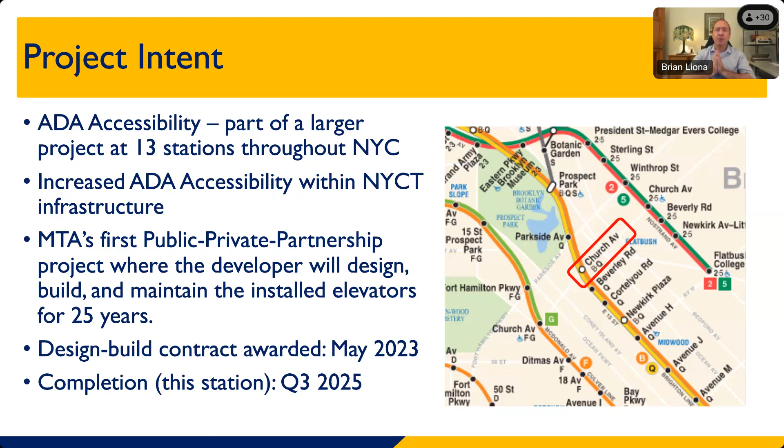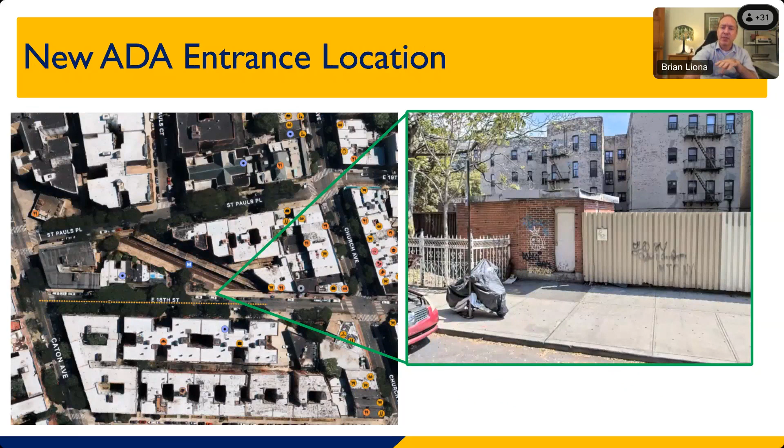This part here is a rendering of how that new entrance is going to look. I'll jump back - here you see on the right that area on the sidewalk, and where you see the corrugated steel and that brick structure, that's an unused MTA staircase, and we're right above the tracks right now. This is an open cut station, and we're going to replace that with this new entrance right in the middle of East 18th Street.

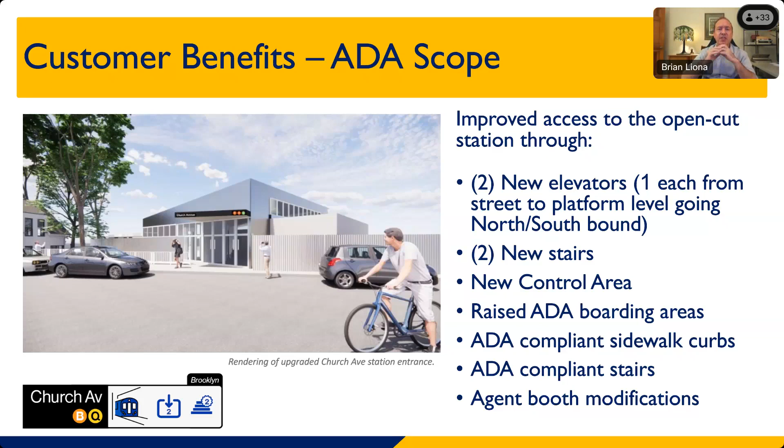We're going to put in 2 new elevators, 1 elevator to each platform, and 2 new staircases. The area you see right in the center, that's our control area, and that's how you're going to enter the station, buy a fare if needed, go through the turnstiles, and then go down to the platform below. We're installing ADA compliant stairs in that location, updating the platform boarding area, and installing tactile tiles at the platform. We're also doing modifications to the agent booth to make sure it's ADA compliant as well.

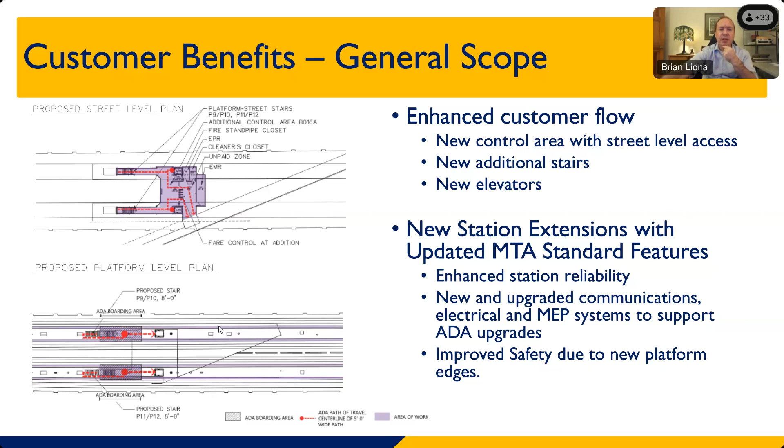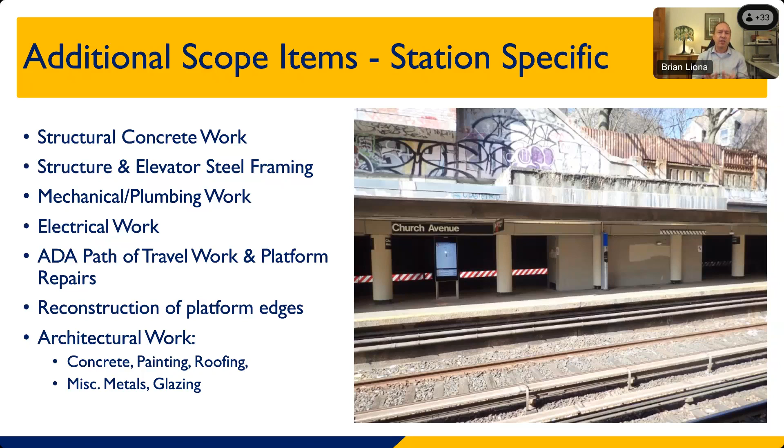As part of this, and to support the elevator, we have new concrete work going on, the elevator framing, and the mechanical and electrical work to support the elevator. The platform is being repaired, and new tactile edges are being installed throughout the platform. We're installing a brand new control area in the middle of the platform that's going to have a new roof, new walls, new glazing, new everything, because it's a brand new and pretty inviting control area.

To preempt an obvious question, why are we putting this in the middle of East 18th Street instead of at Church or Caton? The answer is that at both of those stations, the platform gets much narrower toward the end, making it much tougher to fit in the staircase and elevator. Also, because these are existing stations that MTA has been expanding for years, those areas have electrical and signal equipment. Relocating that would add a lot of complexity, months of time, and quite a lot of money.

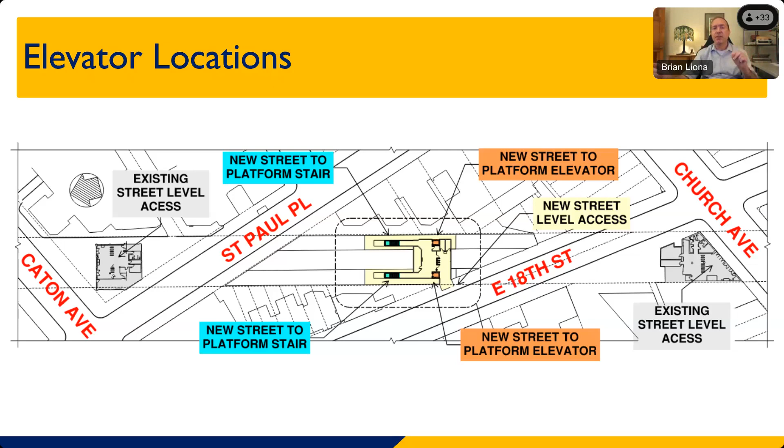So going through that, you can see this East 18th Street entrance, and you can actually see it visibly from the Church Avenue area. By putting it here, another benefit is that the existing stairs at the station are at either one end of the platform or the other. So now we're putting in two more stairs that give the customer an option to exit right from the middle of the station.

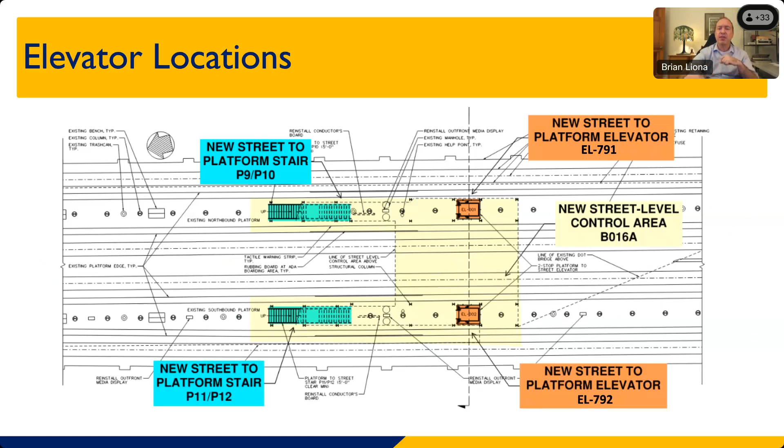Our overall schedule: the contract is going to begin to mobilize at the end of this year, and they're going to start to set up their work area and do some utility relocations that are needed. Additional work will start in the springtime of 2024, and we're going to start with the southbound platform.

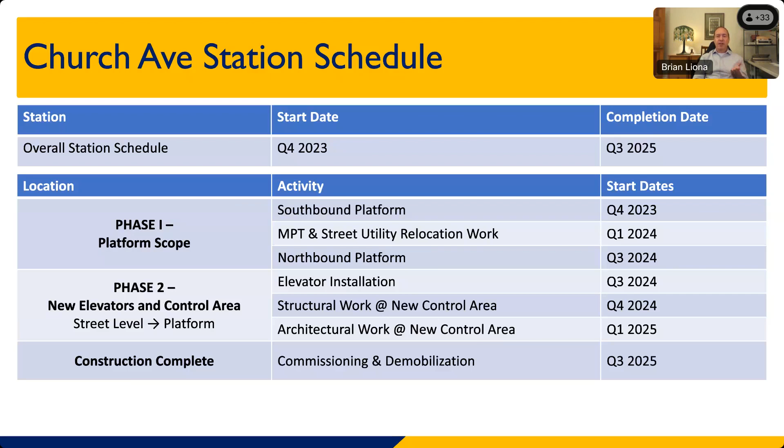By the end of 2024, we'll start to do work on the northbound platform. We'll start to install the elevators in the 3rd quarter of 2024. Then for about a year, we'll be doing mostly elevator work and installation, with final installation and commissioning of everything by the 3rd quarter of 2025.

Another key item you're going to want to know about is how are we going to accomplish this, because we're putting in a brand new control area right over the active tracks. It's a complex project, to be truthful about it, and we actually studied quite a few ways to get this done as efficiently as possible.

To do this, we are going to have three partial closures. What those closures entail is that the station will never be closed full time. However, for 60 days at a time, we will have to close down either the northbound or the southbound tracks. When that occurs, a customer would have to take the train to the next stop and ride back to get to Church Avenue.

Additionally, in the center, two tracks are the express tracks. They will be closed down also for 60 days. During that period, both the northbound and southbound tracks will be open.

Now, even with that work, when we bring in items like the structural steel and start to bridge over the tracks, we will have a total of 8 weekend full closures. Those will occur on a weekend only, beginning on a Friday night at 10 p.m., and the station will be back in service Monday at 5 a.m. So for that weekend, the station will be completely closed.

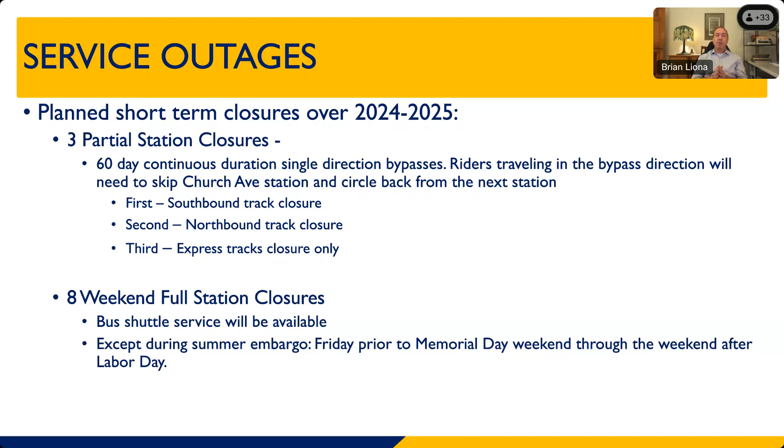Because of that, MTA will provide bus service on that line, so customers impacted by the closure will still be able to get to the next open station by bus. We also provided constraints that this work could not occur during the summertime period, so any full weekend shutdowns will occur on weekends not including Memorial Day weekend and Labor Day.

If you're in the area, you may have seen some of our people out there. The contractors had teams out there, and MTA has had teams out there. We've been surveying the station and conducting test pits to make sure we know where the utilities are. There's quite a lot of tests we have to do to check the conditions, what's in the soil, where the utilities are, and all that has been going on for the last couple of weeks.

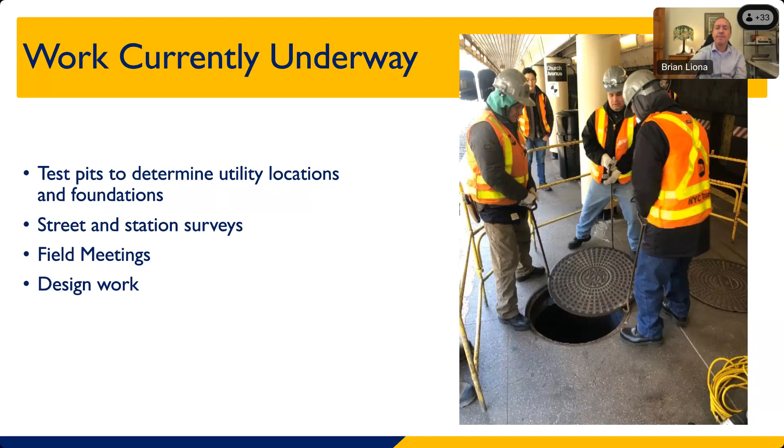Okay, so I've gone through all of our slides, and we can open up to your questions and any comments from the group. Joel, I think you're on mute. All right, thank you for that presentation, it was very impressive. So if anyone has a question, just raise your hand and I'll call you and we'll unmute you if you're muted.

I have a question. Is the work going to be done during the day, not nighttime hours? Because when I saw that 18th Street, I'm thinking of the people that live on that block, probably suffer some while this is going on.

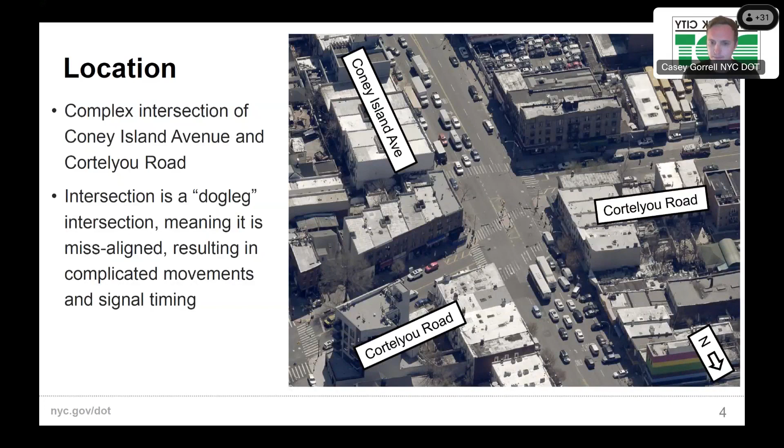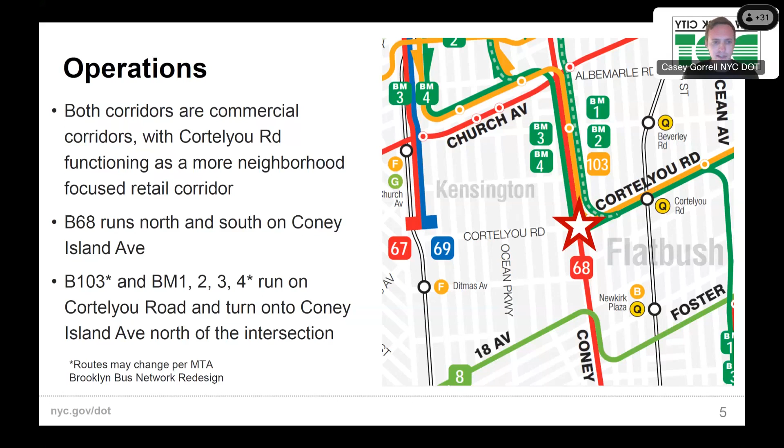Currently, both corridors are commercial corridors, with Cortelyou Road functioning as a more neighborhood-focused retail corridor with restaurants, bars, and retail spaces. The B68 bus runs north and south on Coney Island Avenue, and the B103 and the BM1, 2, 3, and 4 run on Cortelyou Road and turn onto Coney Island to head north at the intersection. Some of these routes have been discussed as part of the MTA Brooklyn bus network redesign, which isn't final and is still in draft form, but we are coordinating with New York City Transit and MTA on bus operations as part of this intersection study.

Due to the wide nature of the intersection, when Coney Island bound left turns got the green light, they would actually jump in front of through traffic to beat it into the intersection. This led to a lot of near misses with pedestrians who were in the crosswalk with the right of way.

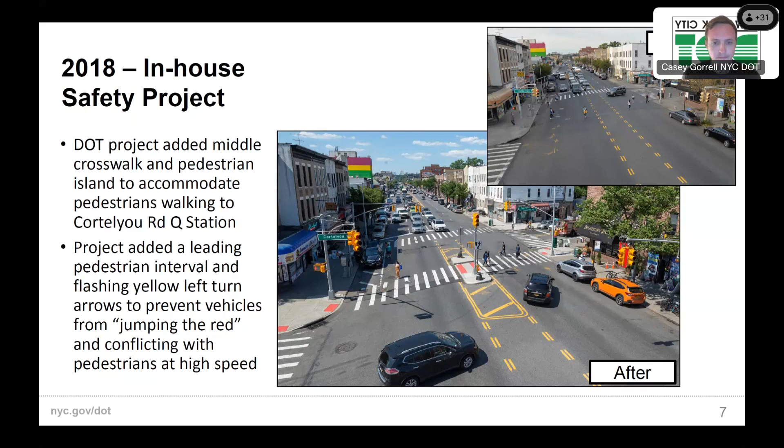As part of the project, we do standard before and after safety analysis, looking at 3 years before and 3 years after. Since the project was installed, we saw a 30% reduction in injuries for all roadway users, and specifically a 40% reduction in pedestrian injuries. One thing to note is that our before-after safety analysis only accounts for reported injuries, not more perceived safety issues such as near misses or the general feeling of being unsafe in the intersection. We can't really analyze how people feel, but we can look at reported injuries, where we did see a reduction in crashes.

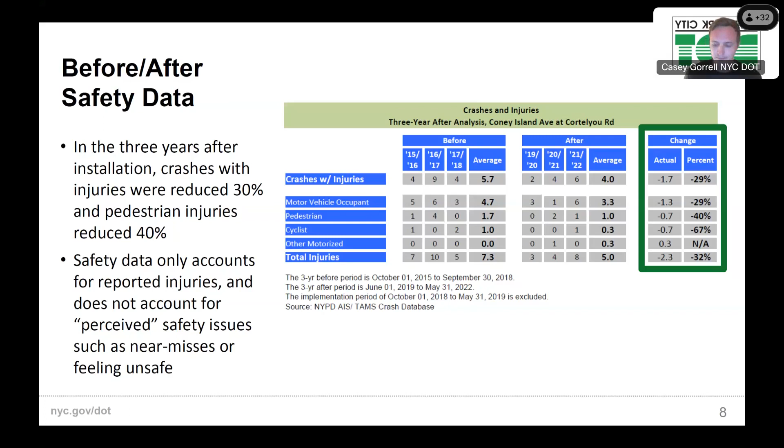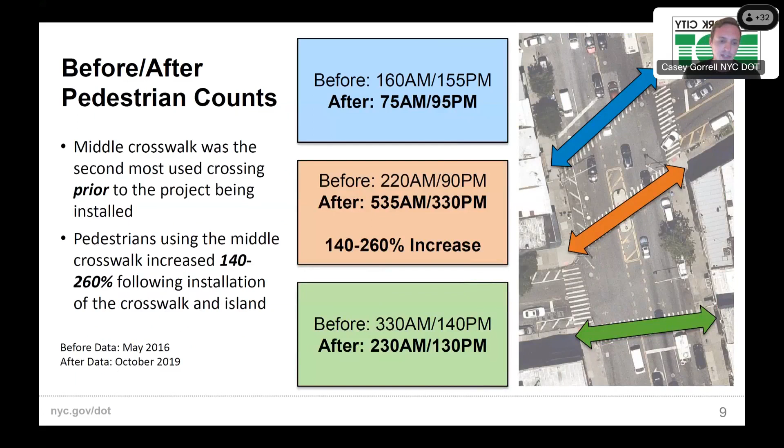We also did before-after pedestrian counts to see who was using the crosswalks. Prior to the project, the middle crossing, which was unmarked, was the second most used crossing in the intersection, with over 200 people using it in the AM period. After the project was installed, we saw a 140 to 260% increase in people using that crosswalk. That middle crossing is now the most used crossing in the intersection, with over 500 people in the peak hour. These pedestrian counts were collected in October of 2019.

So, existing conditions. We've gotten a lot of requests for further changes from the community - 138 requests for improvements to the intersection since 2018 and the project being installed. We saw a spike in requests after the project was installed in 2018 and 2019, and saw that spike again in 2023 after a community-led organizing effort at the intersection. The vast majority of these requests were from private citizens.

We did a bit of analysis of what people were requesting. Pedestrian issues were about half of the complaints, primarily the conflict between pedestrians and vehicles going at the same time across Coney Island Avenue - that was the most identified issue. The second most requested item was adding left turn arrows, as well as general safety concerns. Other requests noted included looking at turn bans, making right turns only, removing the crosswalk, alleviating congestion, and enforcing double parking.

So the area of interest is Cortelyou Road and Coney Island Avenue.

The main issue here is the non-standard movements. The through movements cross multiple crosswalks as you go along Cortelyou Road. By design, the through movements function as a left turn followed by a right turn, where people turning left across the middle crosswalk are required to yield to pedestrians with the right of way. However, the non-standard operations do lead to some confusion and aggressive turns.

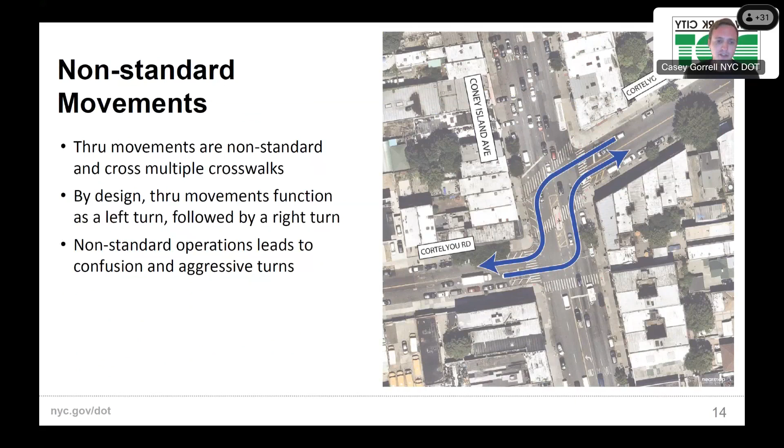Due to the complex movements, the middle crosswalk does proceed at the same time with these turns due to signal timing. We've noticed that many vehicles do not fully yield to pedestrians with the right of way in this crossing. We also want to note that pedestrians in this intersection have no dedicated crossing time in the signal phasing. All crossings are shared with turning vehicles for all movements.

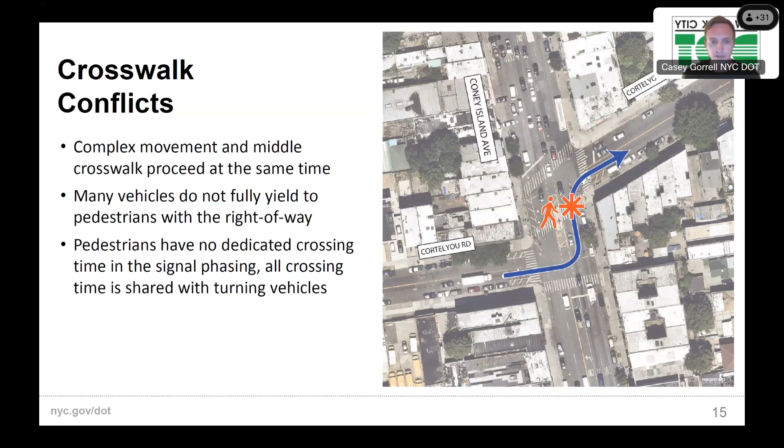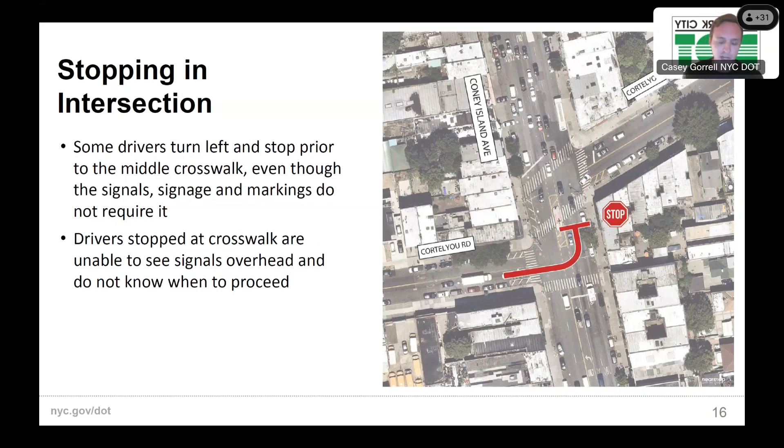We also noticed that some drivers stop in the middle of the intersection when they make a left turn from Cortelyou Road, even though the signal, signage, and markings don't require that. A big issue with that is that when drivers stop at that middle crossing, they're not actually able to see the signals overhead, and they have no idea when they're able to proceed on a green light for Coney Island Avenue. This leads to aggressive driving, congestion, and a lot of honking.

Another issue at the intersection is the difficult left turns from Coney Island Avenue to Cortelyou Road. Due to the heavy through volumes on Coney Island Avenue, the left turns are very difficult to make, and there's not a lot of gaps in vehicular traffic.

The difficult left turns are a driving factor which led New York City Transit to consider moving buses off of Cortelyou Road onto Beverley Road. This intersection was a major driver of bus congestion and delay. Also at the intersection, many of the left turning vehicles actually turn on the red at the end of the signal phase because that's the only time there's a gap in through traffic.

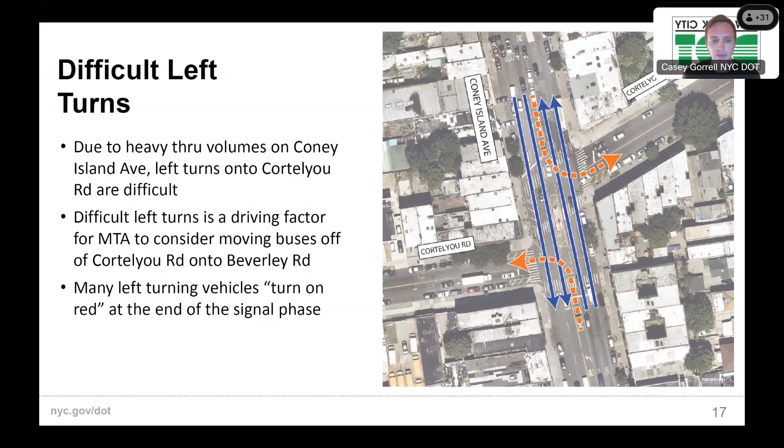As part of our analysis, we wanted to really identify who's in the intersection and what people are doing. At a very high level, 1/3 of people using the intersection are pedestrians, the majority of which are crossing Coney Island Avenue. The other 2/3 are vehicles, trucks, and buses. Also an interesting note is that most of the traffic is actually on Coney Island Avenue. Cortelyou Road is actually a relatively small portion of people in this intersection.

Now I want to go through some of the design scenarios that DOT has analyzed. We're really looking to get community input on these and gain more information on possible issues that we didn't identify, and also get reactions to some of these proposed treatments. I'll be outlining the scenarios and going over pros and cons of each, and also providing an initial determination that DOT has made on potential feasibility.

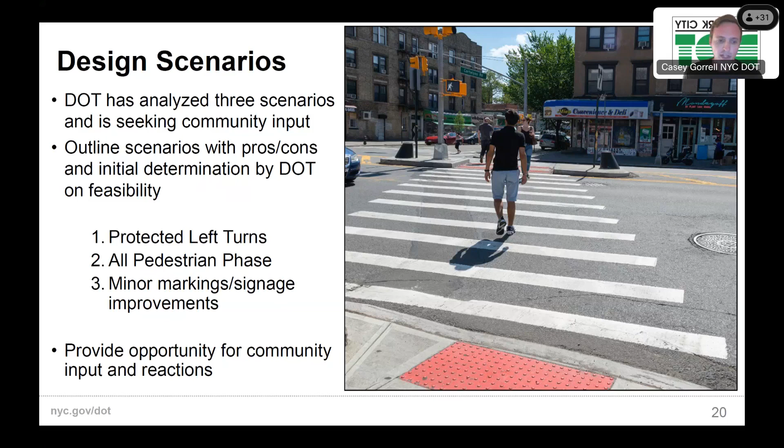So the first one is looking at protected left turns for Coney Island Avenue. The second is considering an all pedestrian phase for the intersection. And the third is looking at making minor markings and signage improvements. Then at the end of this, once we go through all the scenarios, we'll open up for community discussion and reactions.

So the first scenario we looked at was adding protected left turns to Coney Island Avenue to make the left turn onto Cortelyou Road. This scenario would add a 12-second protected left turn phase with a green turn arrow. We would not make any other changes to the intersection under this scenario.

So what would you have to do to make this work? Currently, the signal timing is limited to a 120-second signal cycle. A good way to think about signal timing is that it's a pie, everyone gets a slice. You don't really add time, you have to take it from someone else. So if you want a new slice, you have to take it from another direction.

A big issue at this intersection is that the existing phases for Cortelyou Road are unable to be merged due to the offset geometry and vehicular conflicts. So we currently have to have the phase for the split LPI and Coney Island Avenue through traffic, then a phase for eastbound Cortelyou, and then a phase for westbound Cortelyou.

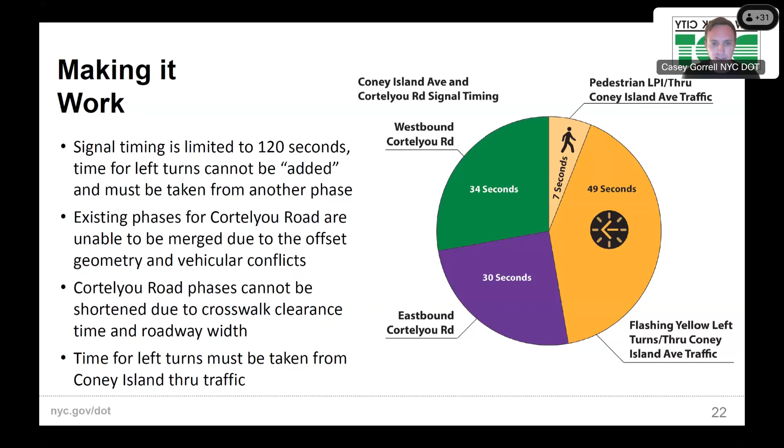Another issue with changing the signal timing here is that the Cortelyou Road phases cannot be shortened, due to the crosswalk clearance time and roadway width needed to allow pedestrians sufficient time to cross Coney Island Avenue. As a result of these limitations, the time for the left turns must be taken from Coney Island through traffic.

So that's where it is proposed. After Coney Island through traffic gets their phases, there would be a 12-second protected left turn phase. Instead of the current 56 seconds that Coney Island gets, it would result in only getting 44 seconds.

In comparison, Coney Island Avenue gets 81 seconds of green time at Avenue C, the next intersection to the north. This reduction in time would greatly reduce capacity and would result in queue spillbacks.

It would spill back all the way to Dorchester Road in the AM, and would spill back to Avenue C in the PM peak hour. The level of service would actually degrade from a D and C to an F and D, and the congestion would be very noticeable to the community.

A big reason we're not super concerned about overall level of service, but the queue back is something that can be very dangerous for people, because it could block crosswalks at nearby intersections and cause a lot of aggressive driving at the tail ends of those queue backs. So that's something we're definitely concerned about.

As part of all these scenarios, what we did is take the existing roadway users and determine who would be impacted or affected by these changes.

Adding a left turn phase would improve operations for about 5% of roadway users, those making lefts from Coney Island Avenue to Cortelyou Road. However, the left turn phase would worsen operations for 44% of roadway users who are just driving through on Coney Island Avenue, which also includes bus riders on the B68.

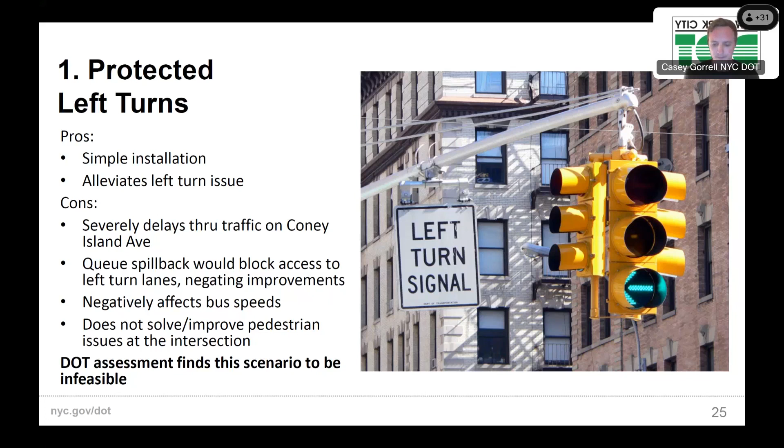The second scenario we looked at was adding an all-pedestrian phase, otherwise known as a Barnes dance, to create conflict-free crossings in the intersection.

This would also add a long protected left turn phase for left turns on Coney Island Avenue without impacting through traffic. However, the required change is that all traffic on Cortelyou Road would need to make a right at Coney Island Avenue. The through and left turns would be banned.

This allows for the consolidation of both signal phases for Cortelyou Road, as there are no turn conflicts between vehicles.

How would this work? To allow for that new all-pedestrian phase, both Cortelyou Road signal phases must be consolidated, requiring all traffic on Cortelyou Road to turn right, as shown in the diagram. The left and through movements would be banned, with turn restrictions reinforced with marking, signage, and vertical elements.

FDNY operations would be maintained, and emergency vehicles would still be able to make all the turns with sirens and lights activated.

So where would these drivers go? From the eastbound direction on Cortelyou Road, the nearest available options are to use Avenue C or Ditmas Avenue to then make the left or right onto Cortelyou Road. For vehicles currently traveling through, that's about 130 vehicles in the peak hour, or 5 cars per signal cycle.

For eastbound traffic on Cortelyou Road turning left to go northbound on Coney Island Avenue, the nearest diversion would be to continue on Ocean Parkway or East 8th Street to Avenue C. That's about 40 vehicles, or 2 cars per signal cycle.

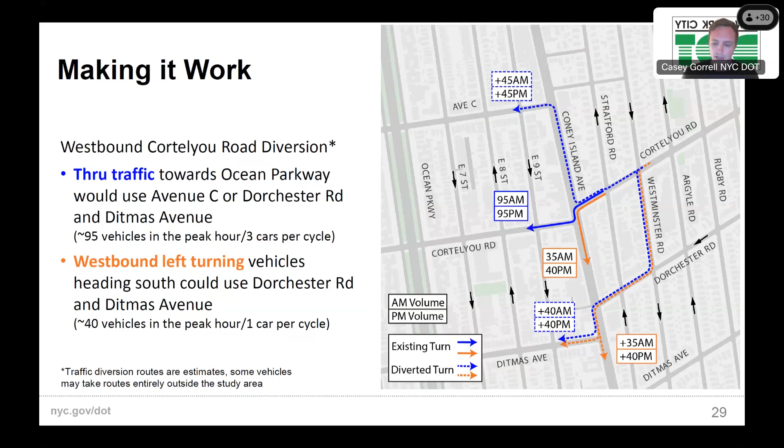One thing to know is that these traffic diversions are kind of the worst case scenario. There's a lot of other routes because we're a grid network, so some vehicles might take entirely different routes to avoid these turn bans. It's not necessarily that all traffic is going to be going down Westminster Road.

So how does this work from a signal timing perspective? Here's the existing and the proposed on the left and right. The traffic diversions allow for the consolidation of the 2 Cortelyou Road phases. The first phase would be Coney Island through traffic. The second phase would be the southbound and northbound left turns from Coney Island Avenue to Cortelyou Road, which would be paired with dedicated right turn arrows for Cortelyou Road onto Coney Island Avenue. This would be a pretty long cycle, so 30 seconds is fairly long for a left turn and definitely for a right turn.

And then the final phase would be a new all-pedestrian phase, which will allow for conflict-free crossings in all crosswalks, giving the 37% of roadway users, in this case pedestrians, about 30% of the signal timing as dedicated space for them.

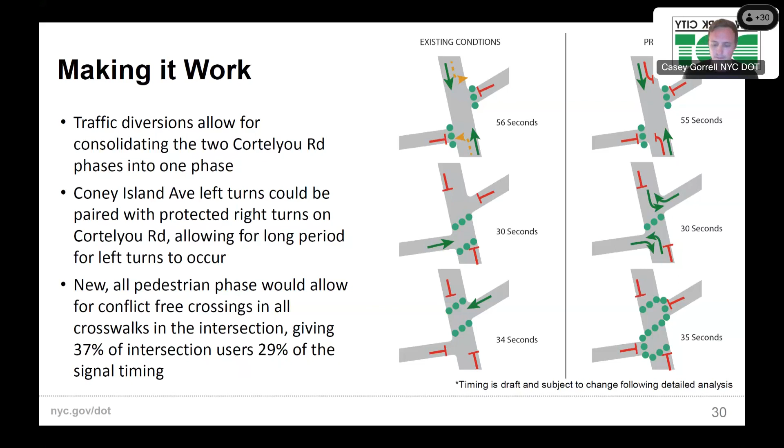So who is impacted by this change? The diversions would worsen operations for 6% of the intersection users, those traveling through and left on Coney Island or on Cortelyou Road, as they'd have to find alternate routes.

The left turn phase would improve operations for 5% of users, those making the left turn from Coney Island to Cortelyou. And the all-pedestrian phase would greatly benefit operations for 37% of roadway users, the pedestrians, by creating conflict-free crossings. The remaining 52% of users would see limited improvements or no changes to operations.

So pros of this scenario: it improves operations for a large percentage of users, 42%. It alleviates the left turn issue, which is the second most requested issue at the intersection. It also alleviates pedestrian safety concerns by creating conflict-free crossings, and it improves bus operations, alleviating concerns from New York City Transit about bus operation delays on Cortelyou Road.

Cons: it does divert some traffic, and some users would have to find alternate routes. Maintaining emergency access does not allow for physical barriers to reinforce the turn bans, so compliance with the turn bans and diversions could be problematic and is something we need to evaluate further. But at a high level, the DOT assessment finds this alternative to be feasible, pending some additional review and potentially additional traffic studies.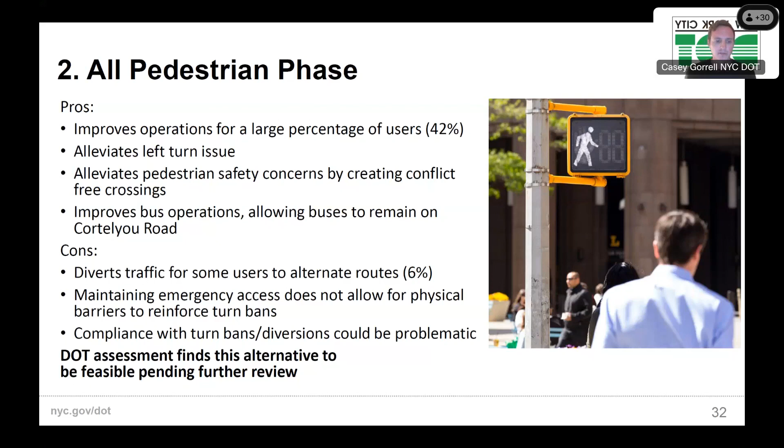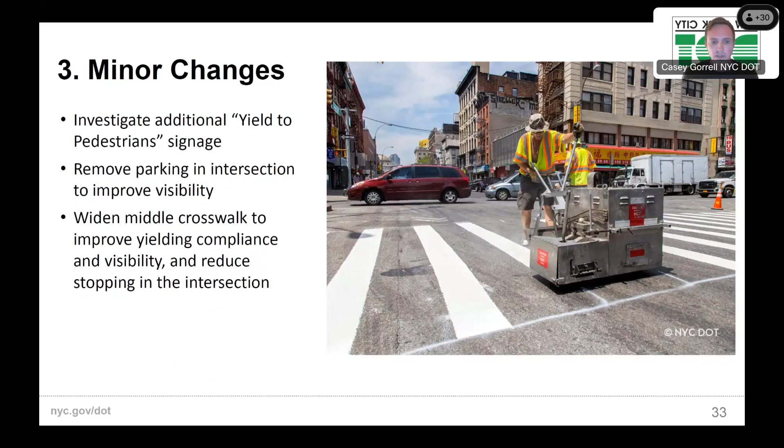The final scenario we looked at is relatively minor, where we would make very minor changes to the intersection. We would investigate additional yield-to-pedestrian signage, look at removing parking in the intersection to improve visibility, and also look to widen the middle crosswalk to improve yielding compliance and visibility, and reduce that stopping-in-the-intersection issue.

Pros is very simple. Cons: it doesn't really solve the left turn issues, it doesn't improve bus operations, and it doesn't really solve the pedestrian issues at the intersection. But we do find this to be a feasible alternative due to its minor nature.

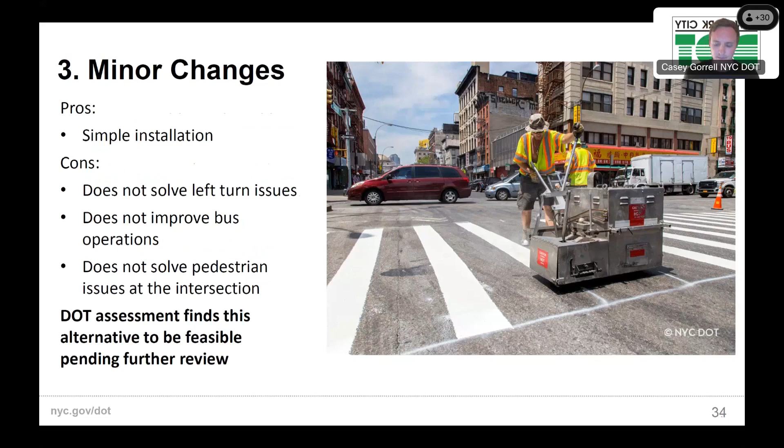So I'd actually now like to open it up for an open discussion about the scenarios. Following this conversation, we will look to select a scenario for further review and then come back to the boards with a full proposal, and then look to identify an implementation schedule, which will be dependent on what is picked as a proposed scenario. Great, thanks Casey.

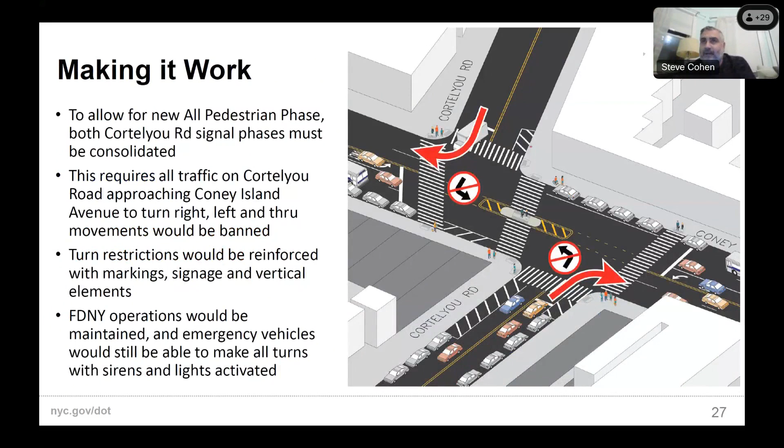One concern I do have, one thing you might give some more thought to, is requiring drivers going eastbound on Cortelyou to turn onto Coney Island Avenue. My concern is that because Dorchester is one way in the other direction, drivers who would usually take Cortelyou across would now have to go all the way down to Ditmas before they could turn, down Coney Island Avenue to Ditmas, then back up. I mean, people can rearrange their routes and use side streets, but that one seems a little more awkward for drivers than the other direction, at least to me.

The other thing I was thinking of, in terms of left turn limitation, if you gave any thought to limiting left turns in the northbound and southbound direction. For example, in the northbound left turn onto Cortelyou, if you foreclose that, I'd assume Avenue C could pick up that traffic relatively easily. And southbound, assuming the buses are still turning left on Cortelyou, it might be worth making that a buses-only left turn during peak hours, because that left turn lane gets really backed up. Limiting it to buses only during peak hours would really help.

Last thing, I think a major issue is the double parking right at the intersection of Coney Island Avenue and Cortelyou Road. Those auto dealers have been using that lane for as long as I've lived in this neighborhood. Something has to be done between the precinct and CB12, because that's creating problems—drivers get impatient and frustrated, which causes them to run red lights and makes the intersection unsafer. I realize it's not DOT's issue, but I think it has to be on our radar for making this intersection safer. Thank you.

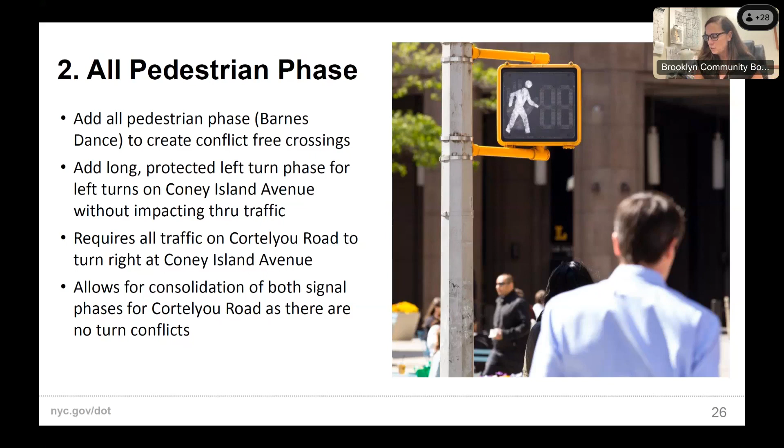I want to take a little issue, not to be picky, with describing Coney Island Avenue or Cortelyou Road as being more neighborhood-focused retail. I feel our community members who are Pakistani American and Bangladeshi American might disagree—the barbers, the groceries, and the masjids on that block might feel they're also a neighborhood-focused retail corridor. So only insofar as that informs how you proceed on both corridors, I just want you to be mindful of that. And I love Steve Cohen's suggestion that we look at teasing out the left turn bans to see if there are other machinations by which they can be organized. Thank you for all of that. You know where to find me if I can be helpful.

Casey, I don't know if through some of these responses that you're hearing, what's your take back, how you feel about some of the feedback you're getting.

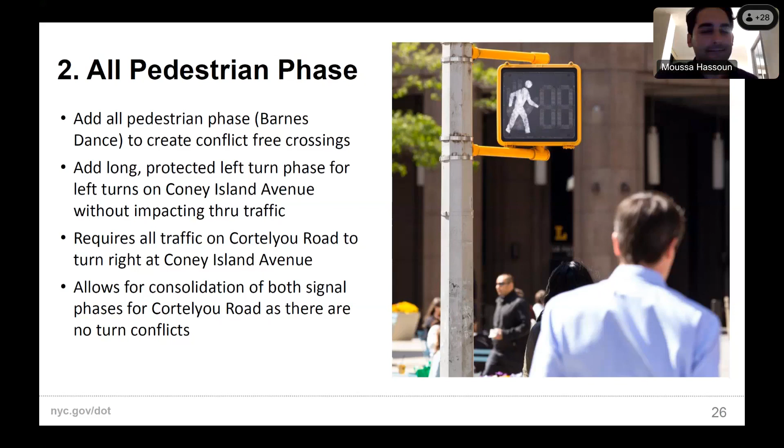Yeah, I think I can just kind of summarize a couple of them. One thing that was noted is the left turns from Coney Island Avenue to Cortelyou Road. I think that's something we did consider. The most important thing is that we definitely don't want to impact bus operations, so doing a bus-only turn is definitely feasible. Compliance is an issue we've seen where we've done bus-only left turns in other parts of the city, so it's not insurmountable, just something that would need thought. The reason we didn't propose it here is because it wouldn't really solve a lot of the issues we see at the intersection. The inability to make a left turn, banning it doesn't make it any easier. And the pedestrian issues, we don't see that left being as big of an issue as the Cortelyou Road left, so we prioritized focusing on those. It's definitely something we could look at, but that's in regards to that comment.

For the neighborhood retail comment, definitely heard. That's more specific, not to generalize the entire corridor, just more for this immediate intersection. But we definitely understand that comment.

And for process, yes, we definitely hear that this is something the community's wanted, and it's something we are looking to prioritize once we have a direction to go in.

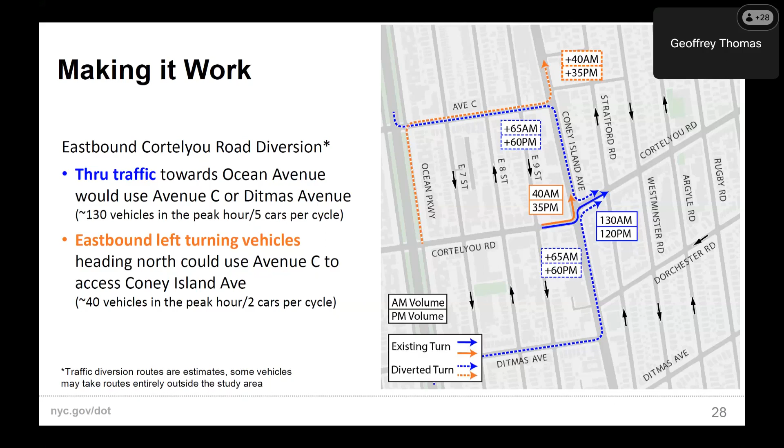Hi, hope I'm connected. Thank you for the presentation, I'm glad you are thinking about this intersection. For some context, I live at Avenue C and Coney Island Avenue, so I'm very close to this intersection and I see issues with it all the time. When I've been out talking to folks, saying we're petitioning for better bike infrastructure or bus lanes or speeding up the bus, a lot of the people I talk to say, can you get the DOT to think about Coney Island? They tell me, I hate that intersection, I think it's so dangerous, I go out of my way to try to cross. People will just bring this up whenever you bring up anything about street safety or street effectiveness in the area.

So a lot of people want this, and I think that speaks a little bit to an interest from the community in doing more. So I would encourage you to think about more ambitious changes. I think the Barnes Dance proposal you have really feels like a minimum. I'm supportive of it. I think it's a decent idea. I think it'll make a lot of people feel safer.

Like the fact that cars have what they think are green lights, but there's also the intersection crossing, it feels like you're allowed to turn, but there's also the pedestrian signal, which is deeply confusing. It feels deeply dangerous. I do want to encourage you also, like I know there's a lot of families, a lot of people who have accessibility needs for crossing this area.

I want to encourage you to think about weighting vehicles versus pedestrians when you think about what's going to change. It is significantly easier for vehicles to go a little bit out of their way versus pedestrians. We know there are pedestrians, myself included, who will go out of their way to avoid the intersection, who will say, maybe I just won't go to this business or location on the other side. I don't want to have to cross it. So I think in terms of how you weight this, it takes a lot longer for a pedestrian to go one block out of their way to get somewhere.

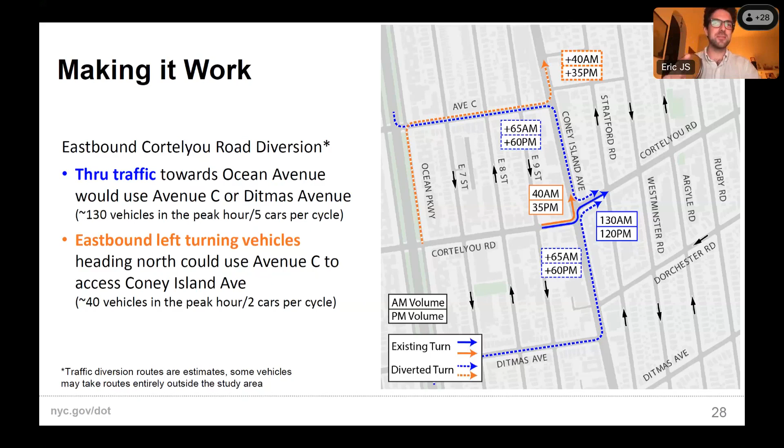Hi, thank you so much for your time. I'm wondering if we could stop the screen share so I can get a little more FaceTime. I'm going to use a little visual aid here. Apparently I can't screen share, but my proposed redesign is called the Long Island.

Essentially, it would be extending the current island farther north and south to physically block the left turns going into the intersection, which seem to be causing the most confusion.

And Eric, it's backward on the screen, so if you would like to just send that to the office, I'd be happy to forward it to DOT. Wonderful, it's inside out and backward.

Okay, so yeah, so the idea would be that by extending the island and creating, I believe what you call a mountable island, to accommodate emergency vehicle traffic, I think that would discourage reckless driving patterns where people will go around or gun through left turn signage.

And one thing I wanted to highlight was that in your analysis of the second proposal, you talked about the types of people that would benefit, and you mentioned that 52% of users would see limited improvements, and then 37% of pedestrians who would see improvement. My feeling is that more people would be attracted to this intersection, so that percentage of pedestrians that would benefit would increase dramatically as they patronize businesses in that area.